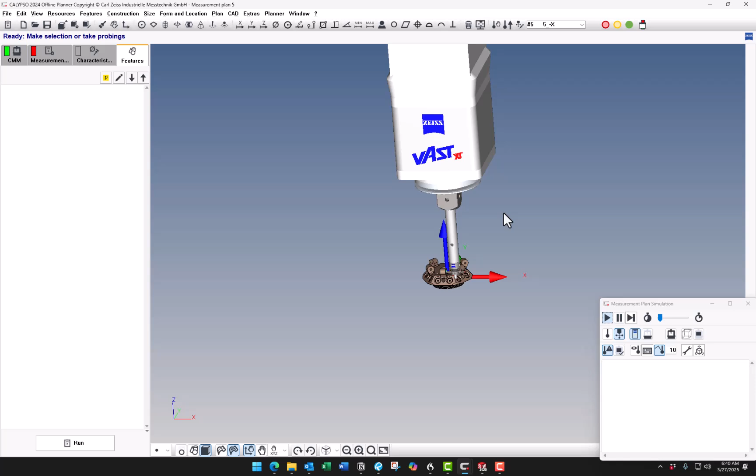If you're working with a Vast XT or a Duramax with a fixed head, you have to use star probes, and on a part like this you don't have the luxury of an RDS rotating head to get into all these different angled holes. So even though I have a very small star probe set up here, it's going to be hard for me to get all these angled holes that I'm looking at here.

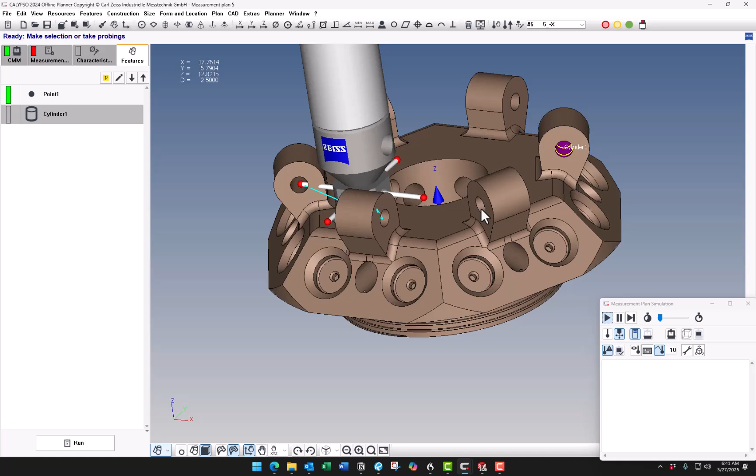I'll just go and extract features to show you. These are the holes I'm interested in right now, and trying to get the size and position of those holes. So as a workaround, what you can do is measure them off of gauge pins. It's not the best approach, but it is something you can do.

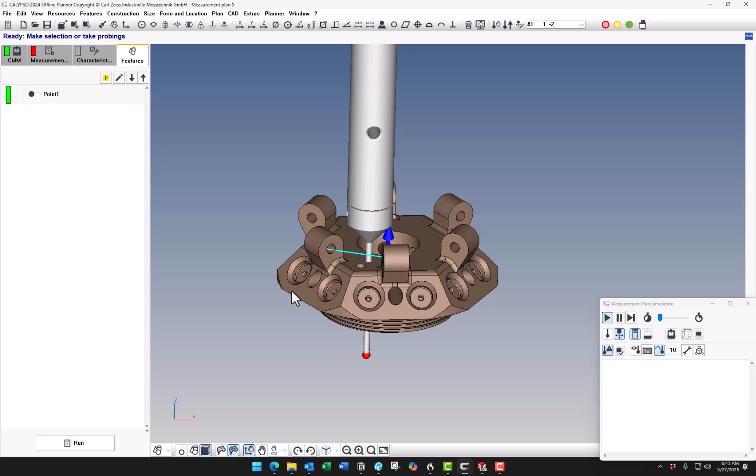So we're going to change our probe here, and we're going to use a down probe. Let's say we use a 2x40. It's a little bit large. Maybe we'll do a 1mm. See if we can find one. Here we go. Z1x20. All right. So if I go define points on the simulator, I can move this probe around, turn off the trails. So that's a good size probe.

And the idea is we're going to insert a gauge pin into the hole and measure off of the gauge pin directly. This approach also applies if you're using a true position locator or a go plug on a threaded hole. So the first step is you're going to extract the cylinder. And then you'll go into that cylinder. And right up here is the inside outside switch. So we're going to flip it inside out. So now it's an outside diameter.

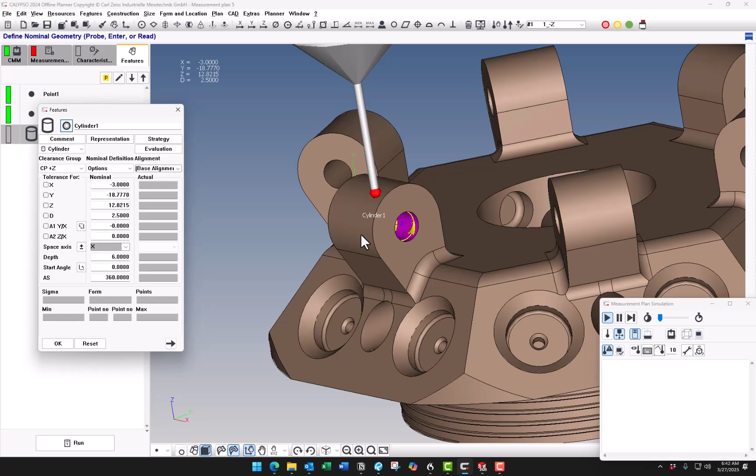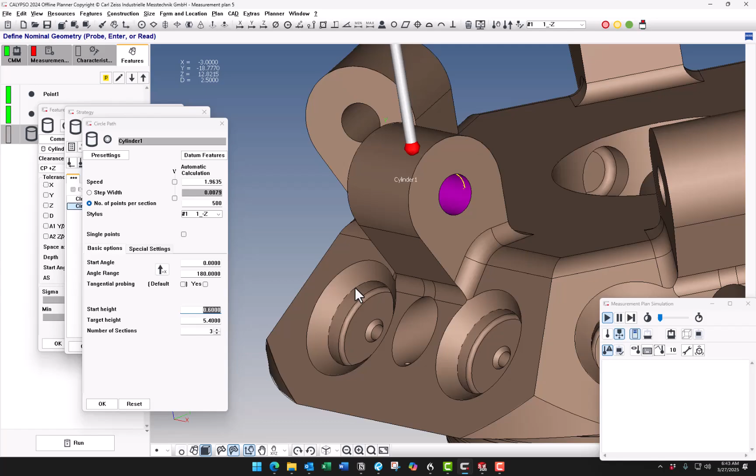And then we need to go to the strategy. We're going to go to the circle path, and we need to do a circle path that's 180 degrees. And we're going to change the start height. Now this start height is relative to where your cylinder begins. So you'll notice this local trihedron. This is not your base alignment or any alignment per se. It's just where that cylinder begins, the base of that cylinder. So this start height is relative to that, right now in millimeters.

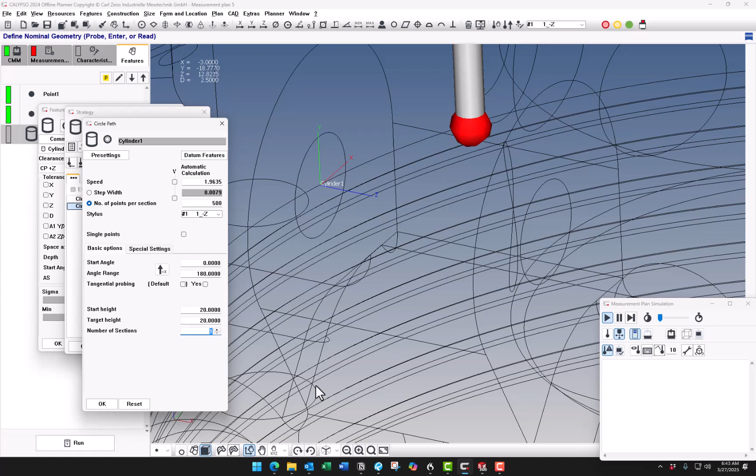And we're going to start farther out. Let's say we go about 20 millimeters. And we're going to do one circle path at a time. Now that's too far out, so we're going to go farther back. We'd like to be as close to the opening of the hole as we can without hitting the probe. That looks pretty good. Since we're doing just one path, the target height doesn't matter, because if I change this, it doesn't do anything. We're going to do two separate paths in opposing directions.

So then we set our speed. Right now we're measuring a 2.5 millimeter hole, and we're doing only half of the diameter. So we'd want to go maybe 2 millimeters a second or less. I'll just go 1. And then number of points, 500 is a little bit overkill. We'll go 300. Okay. So now we're going to copy this circle path. I'm going to change the start height where it begins, and let's say we'll go 12 millimeters.

Now the reason why we want to do this in the opposite direction, first of all, it saves time. So it's going to scan this way and then come over here and scan the opposite way instead of having to leap over the part. Also, occasionally the software thinks it needs to go underneath the gauge pin. So we want to prevent that problem. So we're going to change this to -180, and then the start angle is 180.

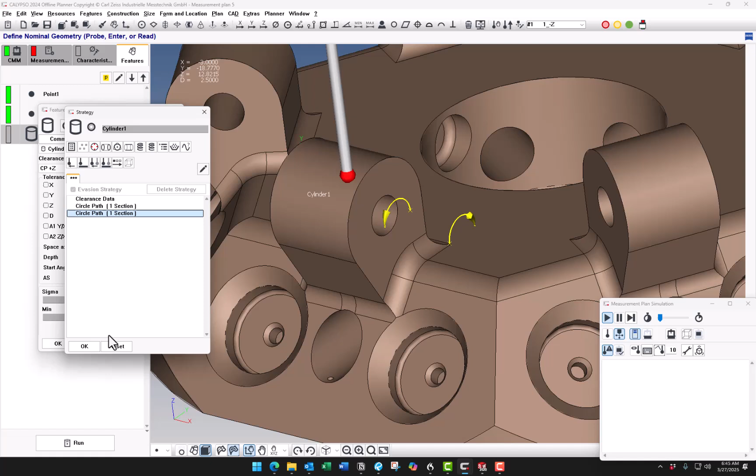All right. The next thing we need to add in is some user prompts so that when it goes to measure that hole, it's going to ask you with a little message to insert the gauge pin. So right in here, we're going to put in a programmable stop right after the first clearance data. And we're going to say insert gauge pin. And you could tell the operator what size. Maybe we would do 2.5 millimeter gauge pin. Most gauge pins are in inches, but you could convert that.

So then you have that stop, and then you could put another stop at the end to say remove the gauge pin. That way, if the program is going to measure anything else where the pin would be in the way, that would be removed. Okay.

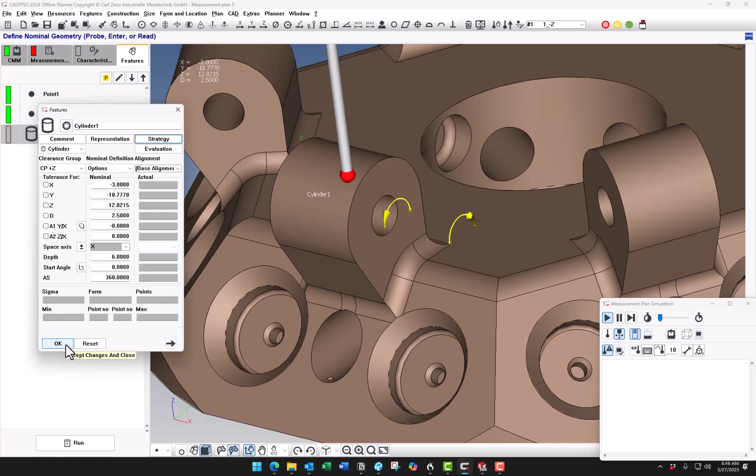Now let's see it in action, how that works. I just set up my base alignment and clearance planes. So now we're going to right click on the cylinder and execute to see how this works. And so it goes, notice the probe went up to the clearance plane, and then here's the message to insert

the gauge pin. So you put the pin in there, make sure it's snug, but it's not going to be too tight where you're wiggling the part out of location. And then we click continue run. It's going to measure off of the pin. And then it will prompt you again to remove the gauge pin. And then it's all done.

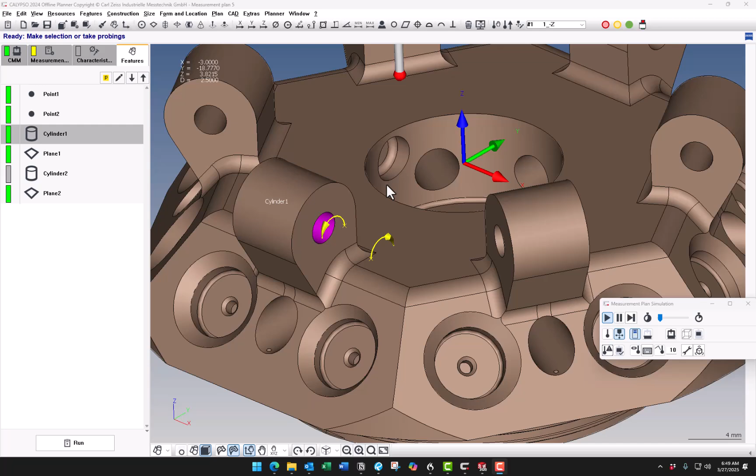Oftentimes I like to give a little bit more room between the probe and the gauge pin or the true position locator so that the probe is farther out of the way when you get those prompts. And one way to do this is to go to create some sub-clearance planes.

So I'm going to plan, navigation, sub-clearance, and then new, and then we'll say this is sub-clearance plus Z, and then this is going to be above the regular clearance plane, and we'll say 100 plus 100. Okay, and the parent group is CP plus Z, and we're retracting to the inner plane 100 millimeters

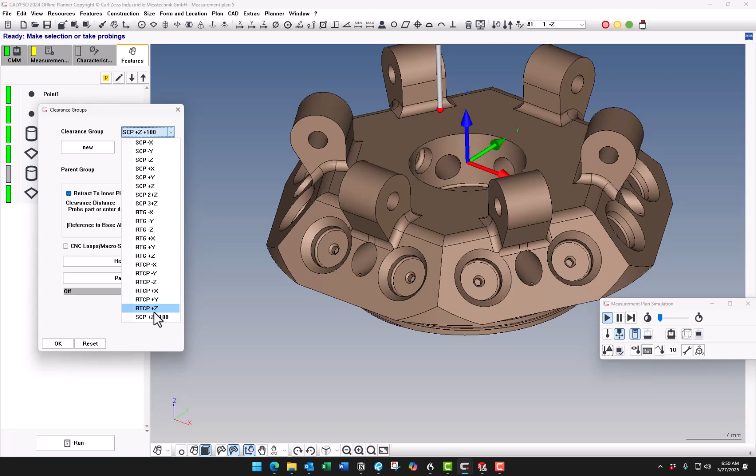above our Z0. It's not really an inner plane, it's an outer plane, but you can still do this. And then you'll notice that's where it's going to move the probe. So it has plenty of room out of the way. Now, when I go to my cylinder, I can assign that clearance plane, or the subclearance plane, and it's going to use that instead.

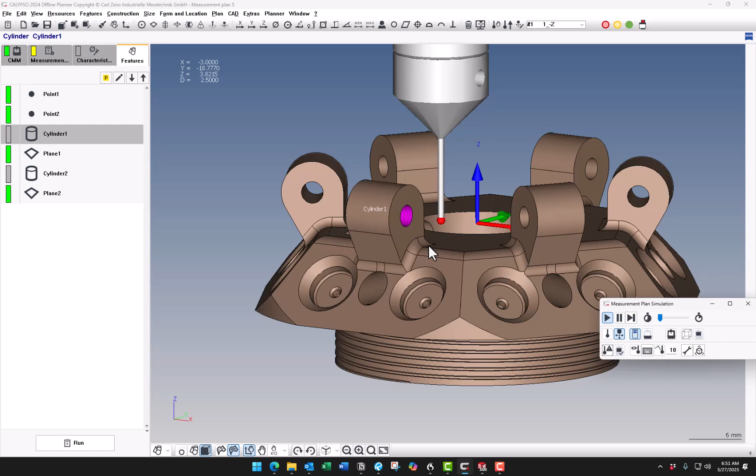So let's test that out. So you'll notice it did not go to that clearance plane as I expected, and I purposely did it this way to show you that you have to put in a double clearance plane. It's kind of a weird workaround, but I'll show you that right after this. So it did go to the subclearance plane at the very end, but not at the beginning.

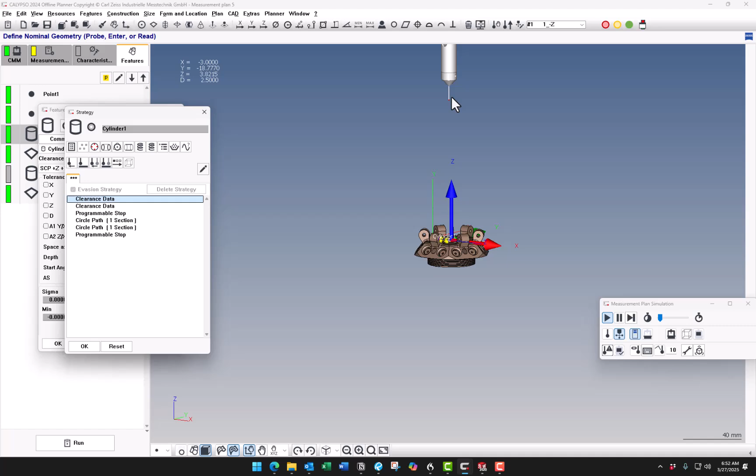So we'll go back in here, strategy. We're going to put in another clearance data right after the first one. And they're both going to be subclearance plane plus Z100. And so this is going to force it to go up here at the very beginning. Also, I'm going to put another one right after the last circle path, just so that I have room when I want to remove the pin.

Okay, not that. We want another one of these. Okay, so you have two at the beginning, another one right after the last circle path, and right before the last user prompt. So let's see how that works. I just want to make sure, I'm going to remeasure this plane right before it just to make sure it goes to the regular Z plane and then it goes to the other feature after that.

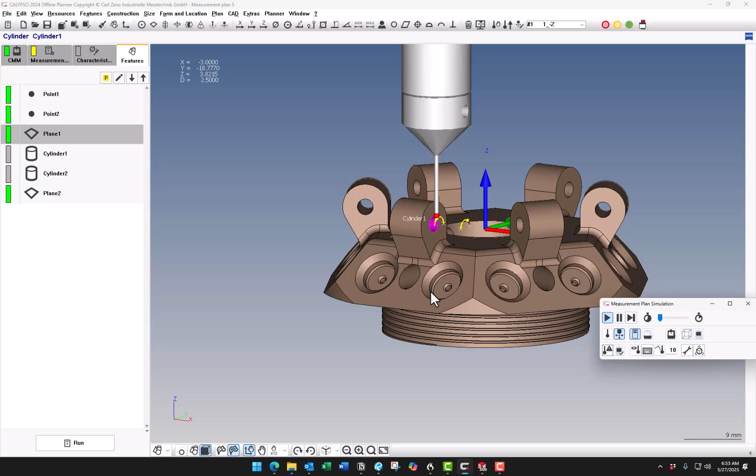Oftentimes when I'm testing, I like to do consecutive features just to make sure the flow is working. So let's run those. It's going to do the plane, and then it's going to come do the cylinder. Notice the probe went way up. You can't even see it right now, but now it's coming down. And there we go. It's out of the way.

So anytime you're doing a measurement off of a pin or a true position locator, you got to put the double clearance plane using the sub clearance plane that's farther away from the regular one. And then you do your programmable stop, circle paths, another clearance move to force it to go away, and then one more programmable stop for a message to remove the pin.